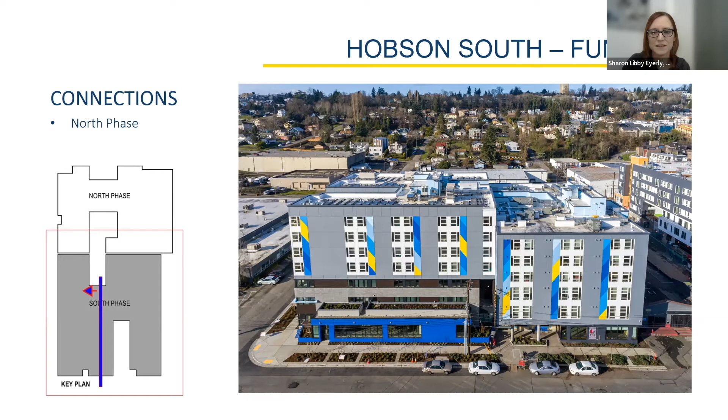Hobson Place South is connected to the north phase building that you can see on the right-hand side of the slide, which we completed for DESC in the prior year. That connection had implications to the passive house air barrier, as well as resident needs for circulation and access to all the different services.

There were additional performance goals in addition to passive house, including operational goals that are typical for all DESC projects. The residential population here is at home for most of the day, and therefore the apartments need to be durable and well ventilated. While these goals sound perfectly aligned with passive house, the operating and maintenance of the building and mechanical equipment is typically done in-house, so equipment selection was very carefully approached. Affordable housing also has limited resources for ongoing maintenance, so the systems as well as the materials need to be durable. Hobson Place South is a demonstration project for a local utility, Seattle City Light, and an advocacy group called Exemplary Buildings Program. This pushed the project to achieve an EUI of 20 and to be all electric.

The biggest changes in reaching those goals were the use of hot water heat pumps for domestic hot water rather than gas boilers, and the 40 kilowatt PV array on the roof. Which is a great introduction to our second F, funding. 2 funding sources became available for the project specific to affordable housing that allowed DESC to pursue a higher performance path.

The first was a state program for ultra high energy efficiency buildings, in which PHIUS is a path to compliance. The second was the Seattle City Light demonstration and exemplary buildings program that I mentioned before.

The design for Hobson Place was largely completed before PHIUS certification and the SCL program was committed to, so measures such as increased wall and window performance, hot water heat pumps, and balanced ventilation with improved mechanical equipment were added after the bulk of design was determined, and those costs were tracked. The incentive funding covered all passive house and SCL adds, plus some soft costs and inherent performance goals.

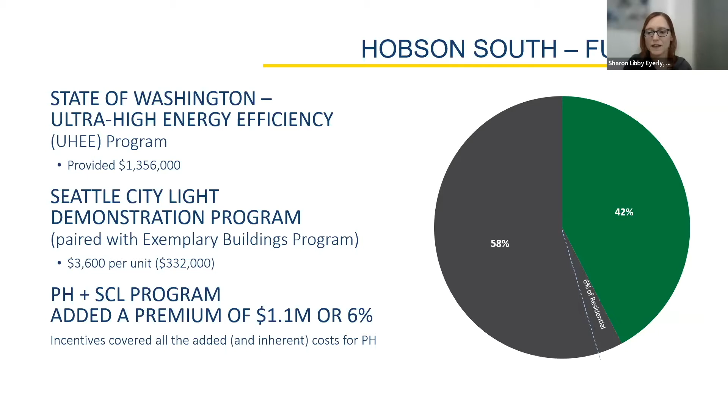It's important to note that while we have seen great cost efficiencies realized when passive house is committed to before and during design, this building being in Seattle, with some of the most stringent energy codes in the country, and serving the needs of affordable housing—think durability, low cost maintenance, operations, healthy air, and materials—really raises that baseline. We'll talk more about challenges of applying passive house to this project, but note that we weren't starting with a poor performing building.

This graphic is a great one to quickly understand what it takes to achieve the goals established by the Hobson Place team. Provided by a local housing advocacy group, HDC, a couple of years ago, this illustrated the main pushes in getting to an EUI of 20, which really need to be addressed with the domestic hot water supply and space heat needs, which translates into the building enclosure for our climate.

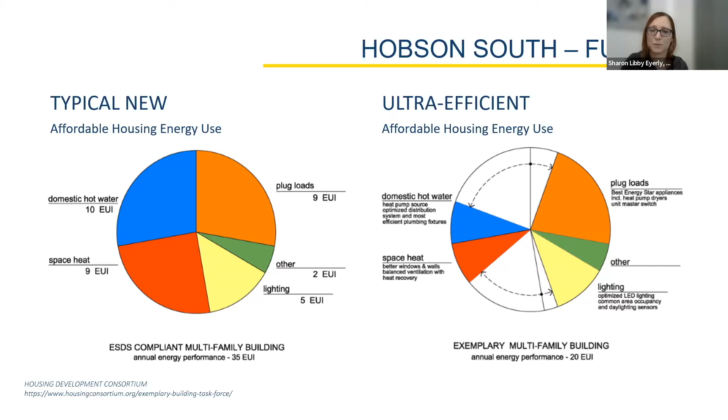We like to think of Seattle as a special place, but it really is for the latest energy codes. Our current codes, which are one cycle beyond this building, now require many of those measures, such as ducted balanced ventilation with energy recovery, a better enclosure, and domestic hot water heat pumps. Essentially, when you look at the difference between code minimum and passive house, that gap is narrowing, and the cost premium will be narrowing as well.

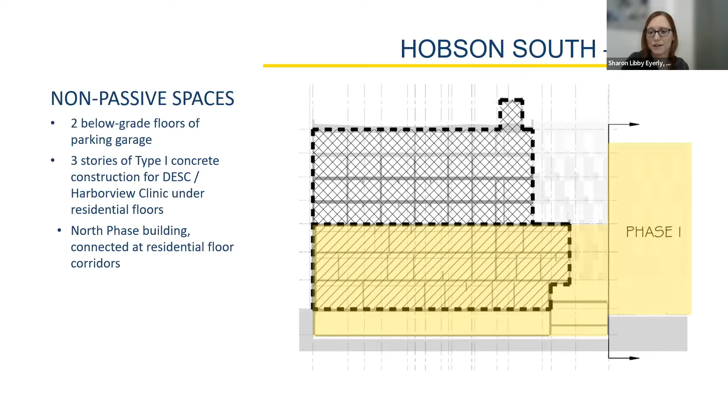Our third F word is form. A significant portion of the building was not included in the passive house boundary—that would be the parking garage, the clinic spaces, and phase one. All of those non-passive house spaces have connections to the passive house enclosure, and in the case of the mechanical shafts serving the different uses, they really cut through those spaces.

Included in the passive house enclosure are the 92 residential apartments in the 4 stories of wood framing over a 4th floor concrete slab. The form and plan isn't simple either, and one could say, why not make this a little easier and make it more of a box? But an affordable housing unit layout is very important—the design needed to accommodate as many units as possible, along with the service spaces needed on each floor, and a simple box doesn't typically allow for that.

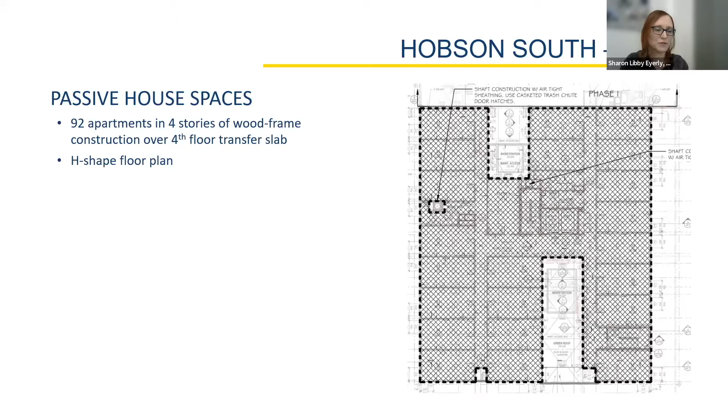Here the H-shaped floor plan suited the unit layout and the owner's needs, and again, that was determined before passive house was decided to be applied to this project. Here's another look at those stair and mechanical shafts in the building.

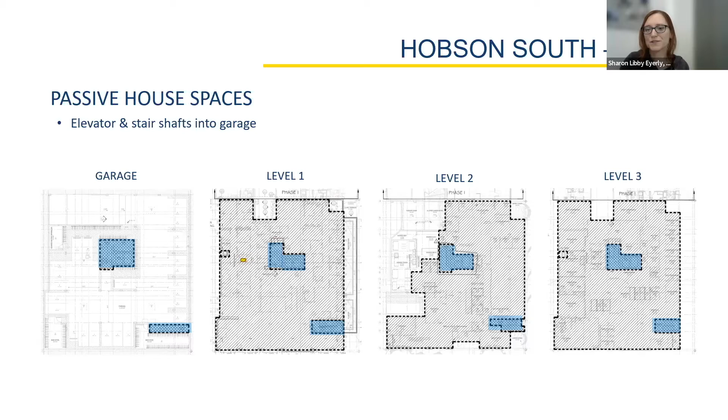These are the passive house enclosure spaces, or spaces included in the passive house enclosure, as they serve the residential spaces. You can see their shape varies a bit as they go through those non-passive house floors at the garage and the clinic spaces. So each of those boundary walls had to be detailed for air tightness and thermal boundaries in cases where they leave the heated portions of the building.

We found that our past passive house experience served us well in many regards, but it was also very different than Hobson Place. As mentioned before, the passive house spaces at Hobson Place are the upper 4 floors, and access to the elevations was via scaffolding and a crane, as there's limited perimeter space. You can see the orange flags that mark out the power lines to the east along here, and so that was our do-not-cross line.

On the west, there's a very small alley that we had to put a job trailer in, and the north side is connected to another building. So the south side was really the only one that was open, but we could also not block the street. Because the building was fully scaffolded, the sequence for installing the exterior wall materials followed the scaffolding one elevation at a time around the building.

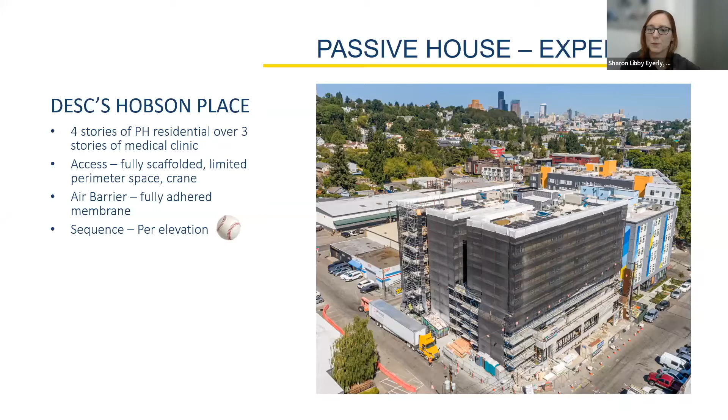This made it a little challenging to plan for a pre-test of the air barrier prior to cover. So we decided to use a self-adhered membrane for the air barrier and WRB to help with that timing and sequence. There were a couple of curveballs with the plan sequencing I'll get into later. We recognized the differences and applied our experience where things seemed applicable, adjusting where the design and site conditions diverged from what we had done in the past.

As I get into more of the details, I only have time to share a few. I'll let you know what was planned, where things went a little differently, and what we learned, and how we accomplished this big of a passive house project, a large mixed use building. I'll take you through some of the key project details, how we adjusted for the larger scale construction, some of the curveballs, teamwork required, and lessons learned.

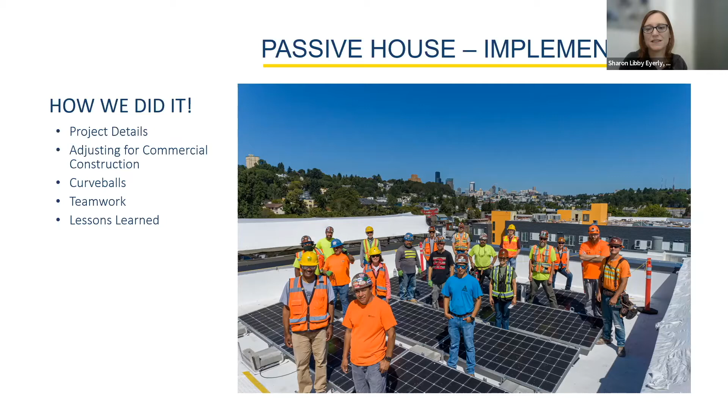Starting at the roof, we had an assembly with R50 insulation and the vapor barrier serving as the air control layer. We needed to reduce penetrations in that air control layer, so we were able to get the ductwork for the passive house areas of the building within the enclosure.

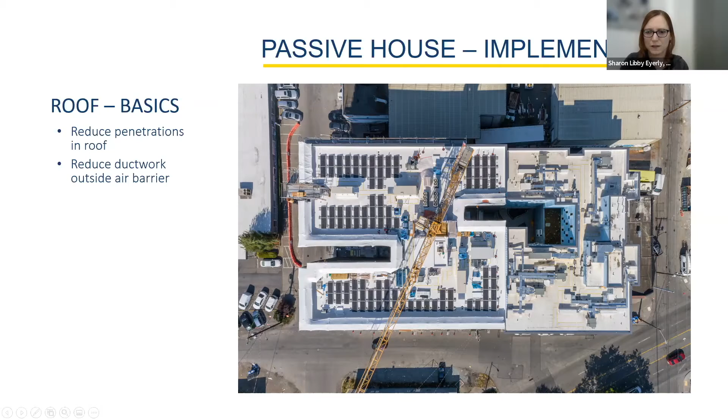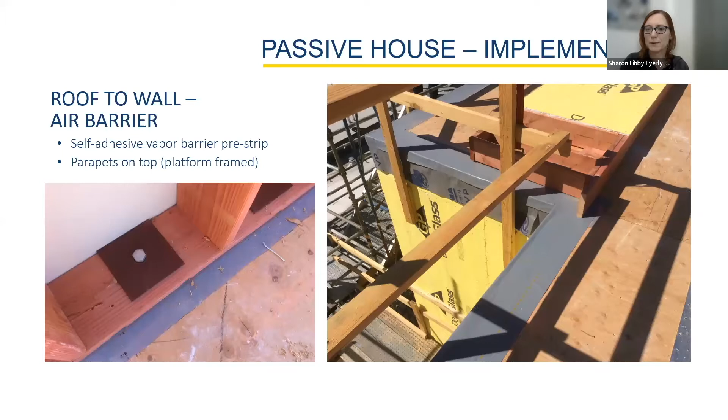We started our air control at the roof perimeter, accomplishing that tricky roof to wall connection with first a pre-stripped vapor barrier that laps over the wall air barrier, then the platform or parapets framed on top. This is a fairly typical detail for us that we try to make happen on every project.

Then the rest of our roof vapor barrier and air control was hot mopped and tied into that peel and stick at the perimeters. All curbs were then framed over just like the parapets, so we could maintain the continuity of the air control layer.

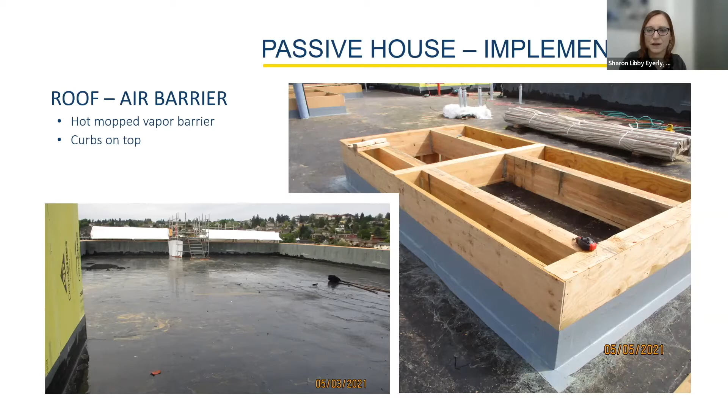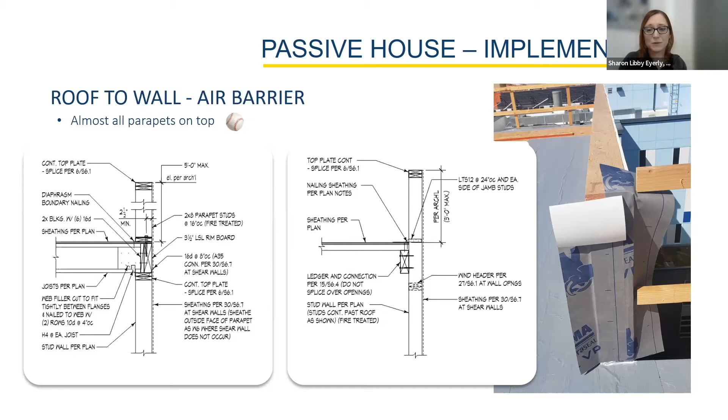We did have one section of the parapet that couldn't be platform framed due to structural reasons that we had to adjust for. Here you can see the two different structural details and how we adjusted the line of air control in the field to go up and over this parapet and still connect back down to the roof. This took teamwork from our design team and installers in the field to ensure all transitions were addressed.

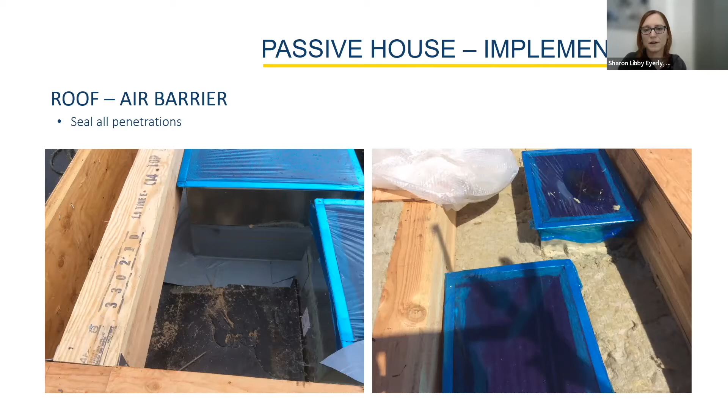Then any penetrations in the roof vapor barrier and air barrier were sealed and insulated. You can see here the mechanical duct stub outs that were in place well before any mechanical equipment was on site, so we could detail them while the other air barrier materials were still accessible. This is a great example of how the typical sequence had to be adjusted to ensure detailing could be accomplished. Those stub outs were also important to have in place early for interior detailing.

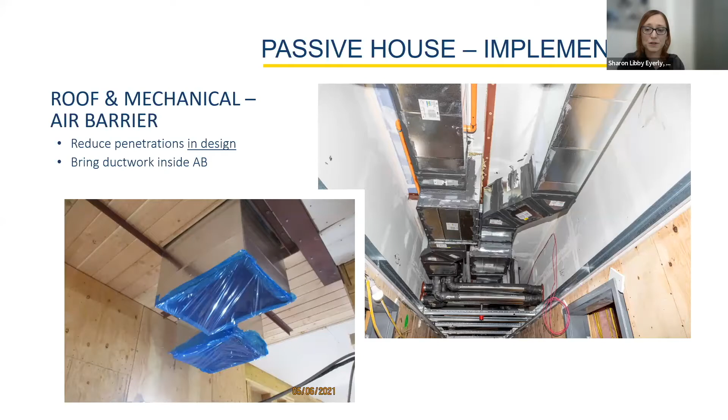These images show the ERV trunk lines that were brought inside the passive house enclosure, fitted into the ceiling space of the 7th floor corridor. That was done by using car decking to skinny up the framing and create a 1 hour rated ceiling space for the ducting to be housed. Our design team worked with the jurisdiction to allow 4-inch ducting into the units, which eliminated the requirement for fire smoke dampers that would have added significant cost. So that was a win on all fronts, really.

The air barrier at the north wall was actually installed with the north phase building. There was a lot of planning for this wall since it was to be in place months before the south phase was even out of the ground. We used a silicone liquid applied air barrier that could be left exposed to the elements and UV.

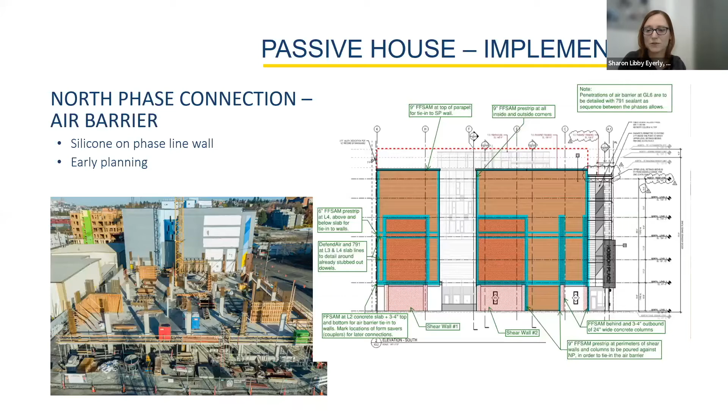Tie-ins at the slab, shear wall, and other transitions were carefully planned ahead of time in a series of diagrams like this one. We worked with the design team on several options for detailing at each of the conditions, so we'd have those options as we moved into south phase construction, and that was before it was even fully designed.

Here is what some of those transitions look like. Silicone transition strips were used to connect the concrete of the south phase to the silicone air barrier at the phase line wall. There were also wall-to-wall connections like this one that had siding held back a few inches in the north phase so that we could tie in once the south phase building was in place.

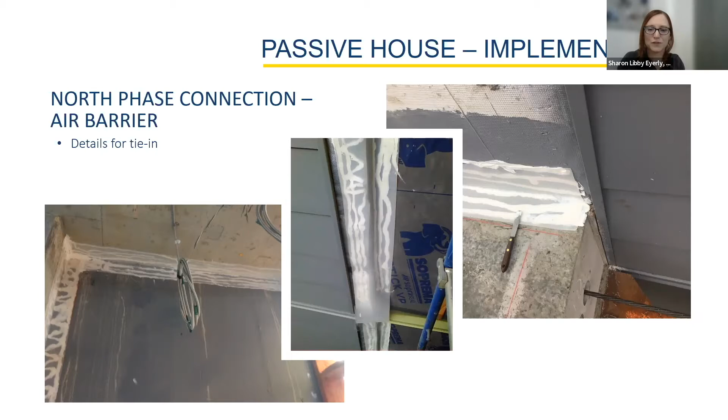Most of our planning worked out for these details. I think we only had one small section where we actually had to remove some siding to access the air barrier and reinstall it.

The south phase building is one story taller than the north, so there was a roof to wall connection too, and you can see our installer standing on the parapet top of the north building, connecting the air barrier into the roofing materials, then again, the roofing vapor barrier of the south phase.

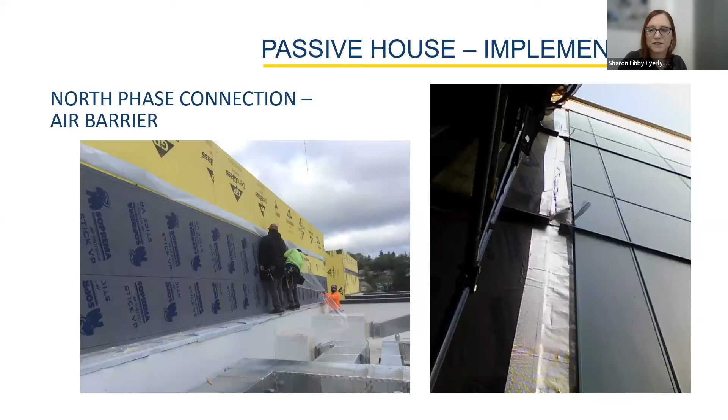The exterior walls were 2x8 wood frame to allow for R30 blown-in batt insulation. This wall assembly is kind of a sweet spot for thermal control in the Pacific Northwest, allowing for an increased R value without going to exterior insulation, but still avoiding that condensation risk within the wall cavity.

Blown-in batts should be installed to the manufacturer's stated density, but how do you check that? One manufacturer makes a density gauge just for that purpose. However, it comes at a cost and a weight, and it'll need to be shipped up from California.

We're sure to use the manufacturer's scrim, because that could affect the density reading on the gauge. But due to supply chain issues, the insulation manufacturer's scrim was actually not available to us, so another one was used. This didn't come as a surprise though, we knew of supply chain issues that have been pretty common over the last two years. So we had actually had the insulator submit on a few manufacturers' products, because no one knew what was actually going to be available when it came time to do the building.

So we measured the density of the blown-in batts the old school way, and this was something we actually did at the Orchards project as well. We cut out a cubic foot and weighed it. We did this check in a few places on each floor before we had Greta do her checks, and that way our insulator could make the adjustments as they installed the material, versus having to come back and slow down any subsequent trades.

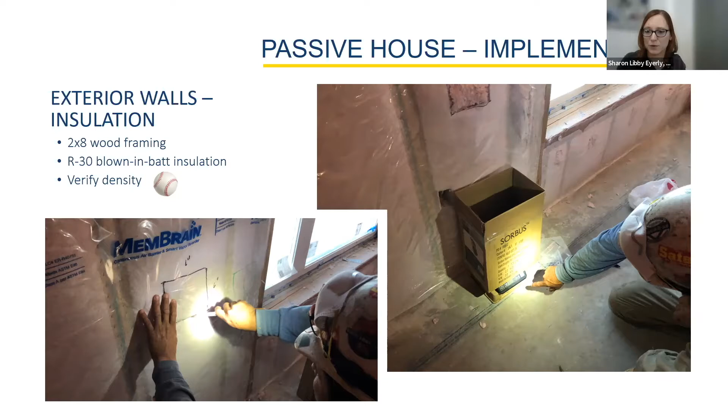One curveball that came our way was that we had a few areas on the 7th floor in the roof penthouse that had 2x6 framing. R30 blown-in wouldn't fit. So once we identified this issue, which was pretty early, our design team and Passive House consultant were able to check the model and approve the R23 blown-in batt for those walls.

However, once the crane was removed, there was no way to get that blowing machine back up to the roof, so a little bit of a catch-22 there. The crane was utilized to hoist that machine to the roof, which I hear is about 2 to 3 times my size, and no one wanted to lug it back up the stairs.

So then the roof and the walls were insulated moving down through the building, a little bit easier to move that machine around. And then the crane was actually removed—it was located in the stairwell, and the crane was removed in order for the penthouse framing to be completed. By then, that blowing machine was actually not on those upper floors at all anymore.

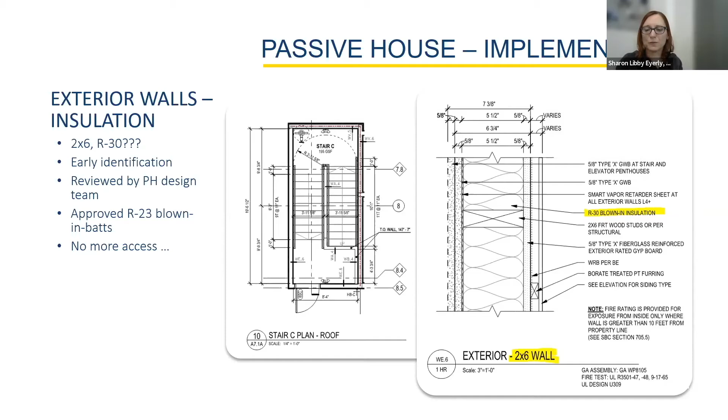So sequencing is a huge part of every project, but for larger scale projects it's crucial, as sometimes it's not an option to hold off another trade or bring equipment back or close off access to areas of the building. This stairwell was going to need to be insulated with batts by hand. Working with our insulator, we found that 2 layers of R15 compressed batts would fit in a 2x6 wall. However, the compression of those batts reduced the insulative value down to R22.

But since the blown-in insulation was only getting us to R23-R24, the Passive House team was okay with this approach. It was in a very limited area, so it didn't have much effect on our model. It was a great example of how working together as a team provided a feasible solution.

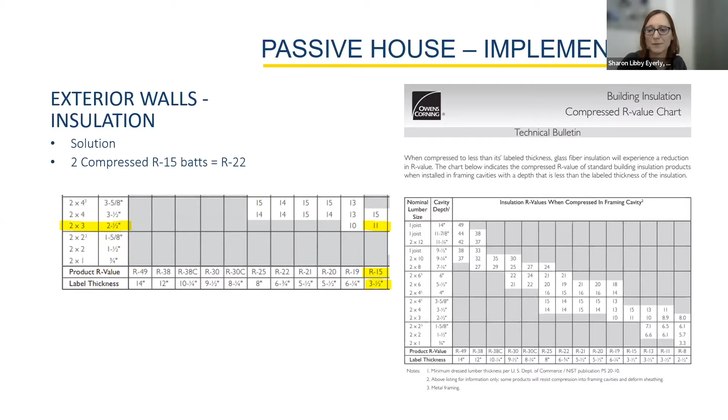This stairwell is serving as our second point of egress for the building, so blocking it off was not an option. Uneven ladders aren't permitted by our safety standards, and scaffolding would have been an extra expense. The insulators were able to correct this with their proprietary extension pole tool, but it wasn't simple with the limits on access. And like safety, structural blocking is not optional either, so that had to remain in place.

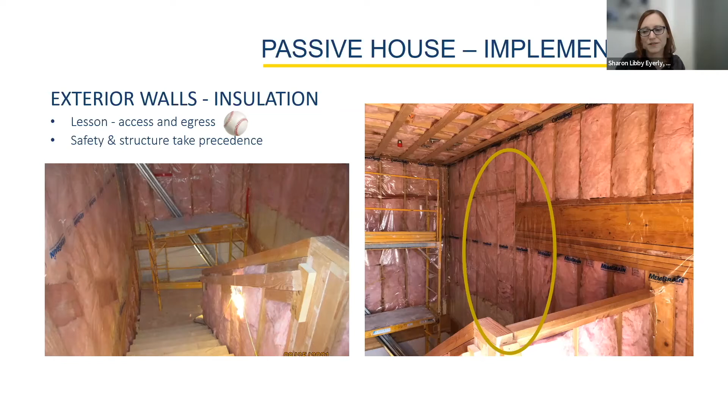It took teamwork from the Passive House design team, our suppliers, and installers in the field to get these walls insulated with the best product and installation possible.

Our windows are all triple glazed with U-values of 0.18 or better. The interior perimeter air seal was made continuous at all four sides, which is typical on all of our projects, and each one is QC'd by our field enclosure specialist, or what we call our skin doctor.

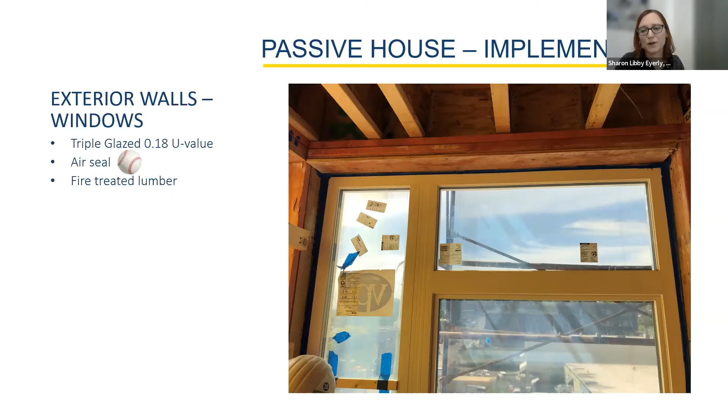If you notice the reddish hue to the framing, that's fire-treated lumber required for Type 3A, which is what we had for the framed portions of the building. We had a slight adhesion issue, but we were able to work with the air barrier manufacturer to find solutions to ensure everything was well adhered.

When we started planning and budgeting for the exterior wall air barrier, we looked to our experience and tested results, and these were our top 5 projects for air tightness. Not all of these are certified Passive House—2 of them are—but we've accomplished other buildings within that range. So these were great experience.

As you can see, 3 of 5 used sealed sheathing for the air barrier. We decided against that approach at Hobson Place since we did not have the open ground access of those previous projects. We also had an install sequence that was per elevation rather than per floor, so we needed to tighten up the timing between installation of the air barrier, WRB, and windows within one trip around the building. That and a few other reasons led us to decide on a fully adhered membrane for the air barrier.

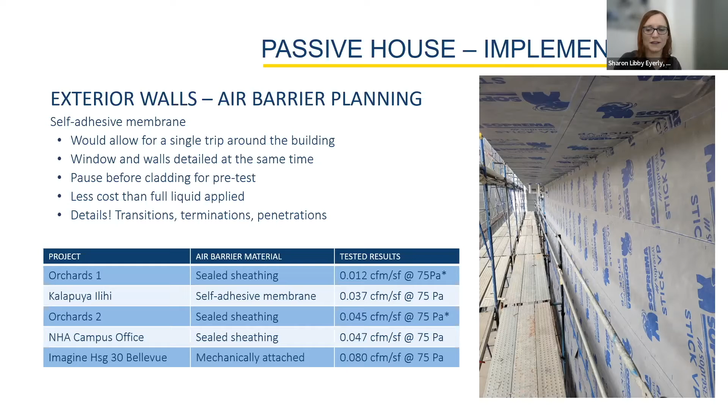This picture is what we had in mind during pre-construction as an installed air barrier ready for pre-test. But during scheduling, we found that our air barrier actually needed to look like this, with all the windows, flashings, and other transitions, terminations, and penetrations fully detailed in order to do that pre-test. We had planned for that in the schedule.

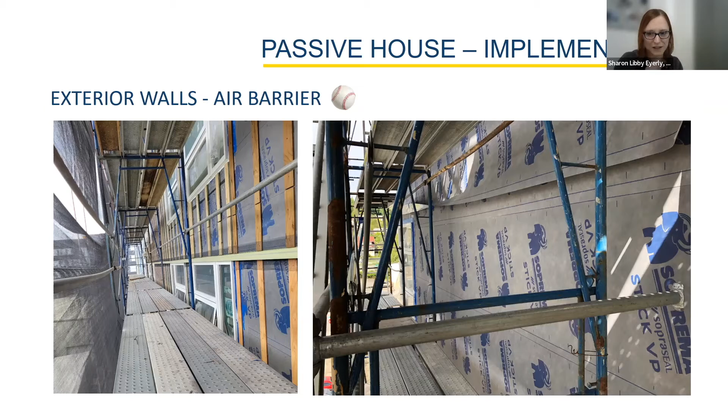However, when the flashings were delayed because of a material shortage, the air barrier started to look like the picture on the right, with unfinished laps, and our carefully planned sequence dance around the scaffolding and crane schedules with multiple installers just got a little tripped up.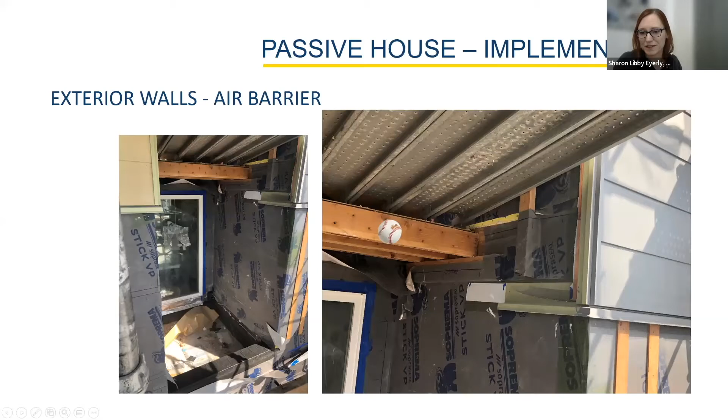And like you can see here, we have a missing flashing saddle that caused this lap to be open and unfinished at the time of our pretest. And that's right at that transfer slab.

Speaking of the transfer slab, if you recall the passive house boundary diagrams I showed earlier, this is the bottom of our passive house enclosure at the top of the clinic space. We had several different transitions at this level 4 slab.

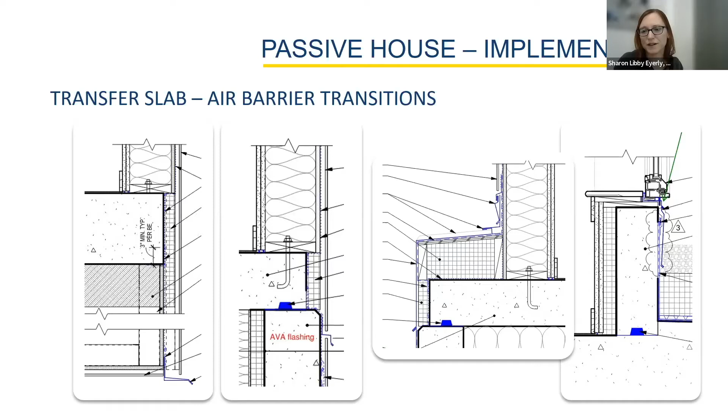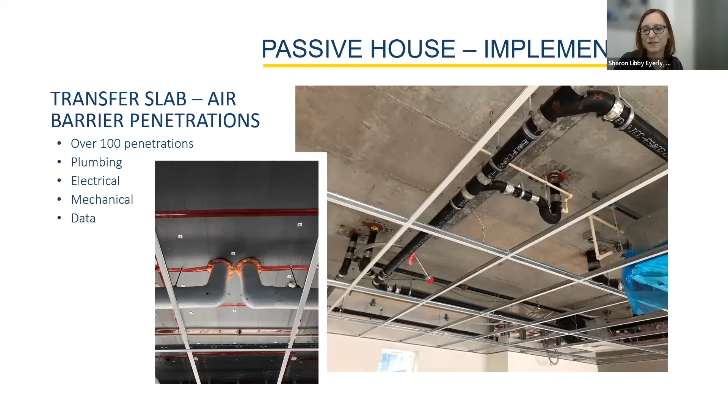As you can see here, overhangs, soffits, courtyards, etc. With each of these transitions, there are multiple installers to manage, from metal framing to insulators, roofers, waterproofers, and siders. From the inside of the clinic, there were also over 100 penetrations in the level 4 slab to get utilities between the residential and clinic floors.

Each one had to be sealed and the details verified with material manufacturers as compatible. And we planned a pretest to review the installed air barrier prior to siding. We did this at other projects with a lot of success. We were able to use infrared and smoke to identify any breaches in the air barrier and then prioritize the correction at those.

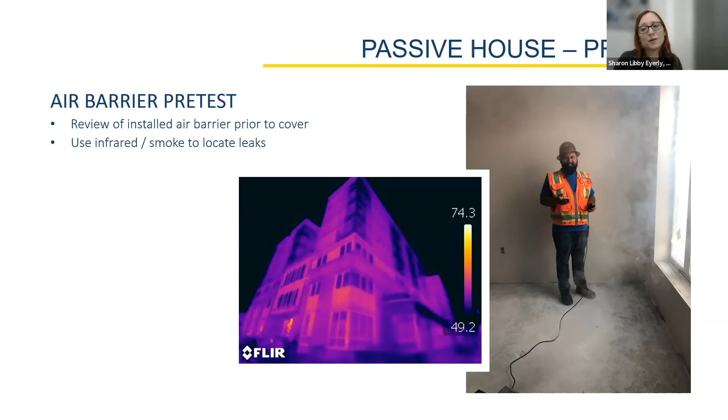But at Hobson Place, we had a few challenges. The elevator shaft walls were accidentally unloaded from the train in Chicago, so only some of them made it to the site on time. Mechanical running into some of the shafts were delayed, which caused a delay for the drywallers doing the shaft walls.

This resulted in some very large isolations, as you can see here. On the left is our elevator shaft. On the right, you can see our project engineer attempting to keep an isolation in place as we turn the fans on.

So for the pretest, we actually ended up isolating the passive house floors a little differently than along the passive house boundary we looked at earlier. Since the elevator shaft was open, we instead tested each floor individually.

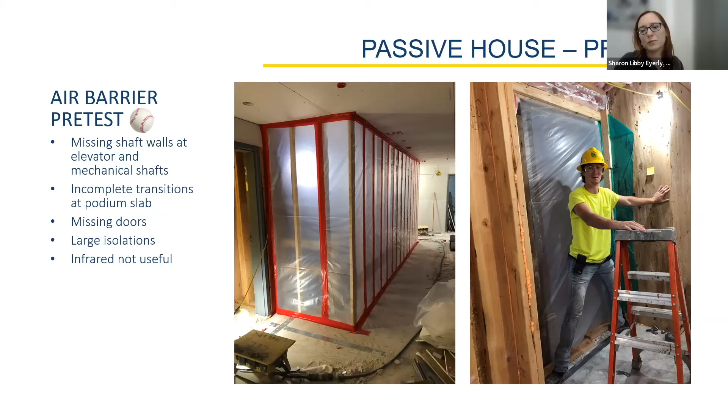And the lessons learned from our pretest were definitely not what we expected, but not all for naught. First thing, kind of obvious, we learned to build better isolation walls. This is the designed opening between the north and the south phase buildings, and plywood with tape seam and spray foam edges works so much better than just plastic.

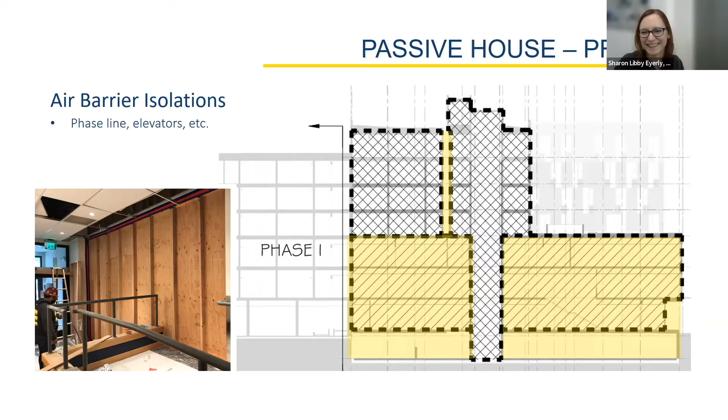We also learned in our pretest to trust ourselves. Even though we were not able to see the leaks with infrared due to scaffolding and warm summer temperatures, we could use our own eyes and hands to identify those leaks and the unfinished detailing.

Our site team was all hands on deck during the pretest, with people stationed throughout the building on the interior and exterior scaffolding, reviewing the air barrier while fans were running. We were able to identify the areas that needed improvement and work to prioritize those in the schedule so that our siding work could continue and we wouldn't have any delays.

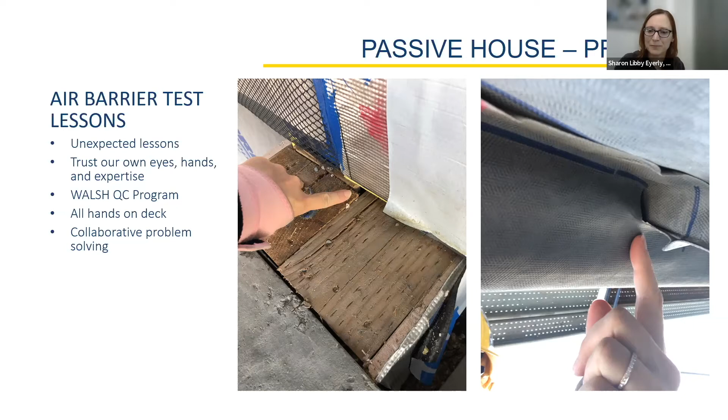And with that, I'll pass it over to Greta to talk about our certification process.

Wonderful. Sharon, I'll just have you click the slides and I'll give you a holler so you don't have to transition that way.

So the realities of the certification process for Big Passive is complicated. PHIUS actually encompasses PHIUS Plus, which has many co-certifications. And this project in particular had other certifications linked to the project's funding. So it was a lot to coordinate.

Sharon had some F words that she talked about, and I'm going to talk about probably one of the most notorious B words in the passive house community, which is boundaries. So yes, this includes the physical boundary of the passive house envelope, but it also includes scope and communication, testing, environmental boundaries, and knowledge boundaries.

So this first one is scope and communication. This requires that the verifier is involved as early as possible on the project to understand who else is on the project team, what their roles and responsibilities are, and what exactly we will need to verify.

As Sharon mentioned, this project had a lot of overlap with other certification programs. So by having meetings with the general contractor and other subs that were associated with the passive house envelope and mechanicals early, we can better determine where there's overlap and how we can share the work and then share those results.

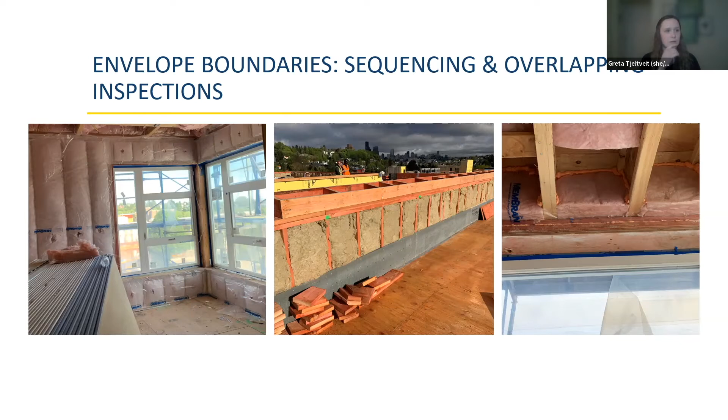For the next slide, similar to what I got into, on-the-go problem solving really allows for less time spent sending reports back and forth and documenting things.

Walsh had a rep from their team who was, I think, their enclosure specialist. They walked around with us, along with an insulation laborer or whoever, to fix things as we went. So it could just be maybe another round of walks to see these corrections, and then I was off knowing that these items had been fixed.

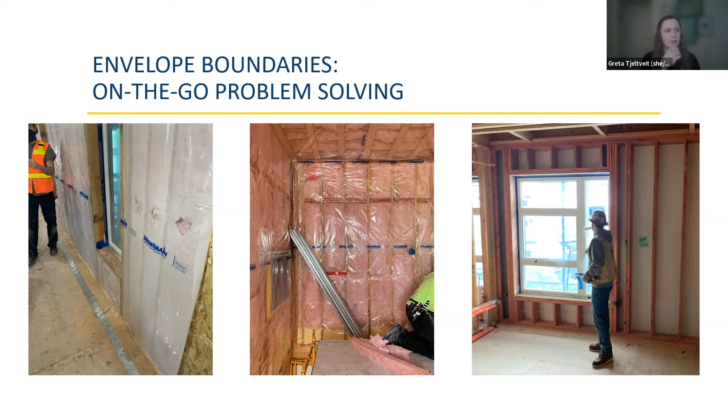For the next slide, also testing the boundaries. As Sharon noted, the volume of what we were testing was pretty complex, with only 4 of the 7 floors being part of the passive house envelope, with basically these legs that went down to the parking portion of the building.

We had the ability to tape off some non-threatening areas, spaces where the passive house envelope abutted conditioned space at the north phase, and at the elevator doors and stairwell doors at the medical facility floors.

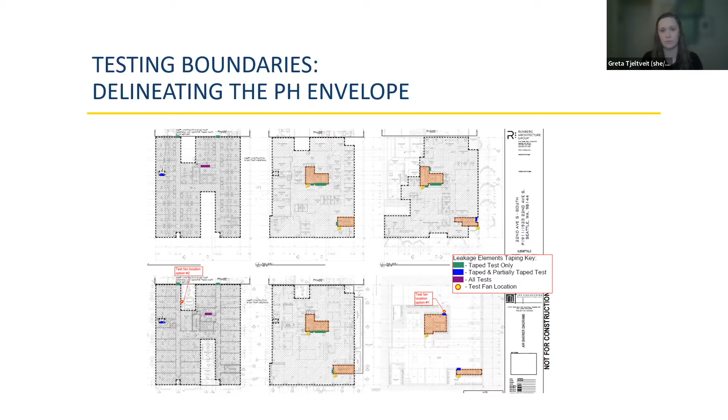That shows much of the taping that we did, everything from those doors to the north phase, the elevators - elements that during a pressurization portion of the test would be blown open. We're able to tape those off, and then things like trash chutes that were basically just connecting all of the floors together.

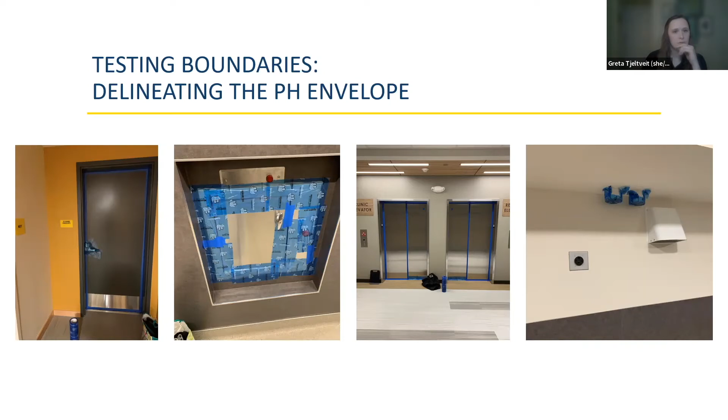For the second to last one here, we did run into some environmental boundaries, specifically the snowstorm that happened at the end of the year. For those outside of the Seattle area, we do have mountains, we do get snow, but it's becoming more and more prevalent, and over the past few years, with climate change getting worse, we're seeing worse and worse storms that we are not necessarily prepared for.

There were certain things with the ERV that we had to fly a manufacturer's rep out to help us fix, because there were issues with condensation. So those were a few hiccups, but ultimately the goal of what Passive House is trying to accomplish is to reduce the effects of global warming so that we can at least be more stable, so that these types of issues can be, in theory, more predictable.

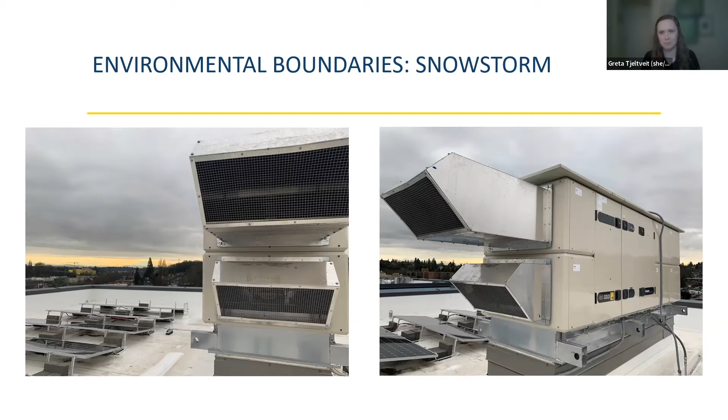For the last slide, something that I think this group will really appreciate is the knowledge boundaries. I'm sure on this call of however many - 107 people on here - there's a huge wealth of knowledge. But sometimes you're so focused on your particular portion of the job that you're not necessarily thinking about what else you might need to know.

So on the left, I'm not an electrician - I don't claim to be - but we needed to measure the power draw for these ERVs to be included within the overall WUFI model. So working together with folks who are experts of their trade and being willing to share that information and knowledge.

I often think of the theory of the curse of knowledge, where you repeat your job and your tasks and your technical knowledge so much that it becomes second nature, but to someone else it's completely outside of their understanding of the world. So just being willing to share that.

I think that's why Passive House Accelerator has been so wonderful, because it's able to get folks into the Passive House community at so many different levels, and can meet you where you're at and bring you in and get you to be the nerd that you desire to be.

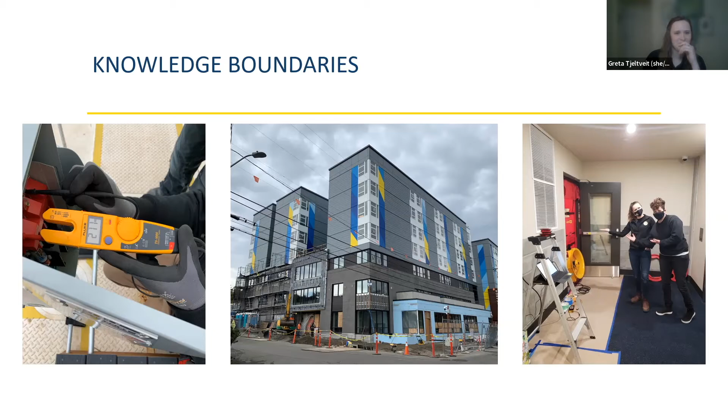We completed this project on time and under budget. We were able to deliver 92 affordable homes for DESC, a behavioral health clinic space for DESC in Harborview, which is one of our largest hospitals here in Seattle. We are currently seeking PHIUS certification, and Greta's handling all of our paperwork.

Our whole building air infiltration rate, for the whole building including non-passive house spaces, was 0.096 CFM per square foot at 75 PA. For the passive house spaces, just those residential floors 4 through 7, our air infiltration rate was 0.074. So under what we needed, yay, with all those complexities.

Our average unit compartmentalization rate was 0.1441, which is well below the requirement. I'll take a second to brag: with an enclosure area of over 57,000 square feet, Hobson Place is likely the largest building in Seattle, and certainly the largest affordable housing building in Seattle to seek PHIUS certification.

So go team, go. Our lessons learned are: early planning really pays. Sequencing is great, and all the planning upfront is very well worth it, but also be flexible, make sure you have an ability to adjust what you think is going to happen.

Thanks everybody, off to you Bev. Wow, well you're going to be busy, Zack.